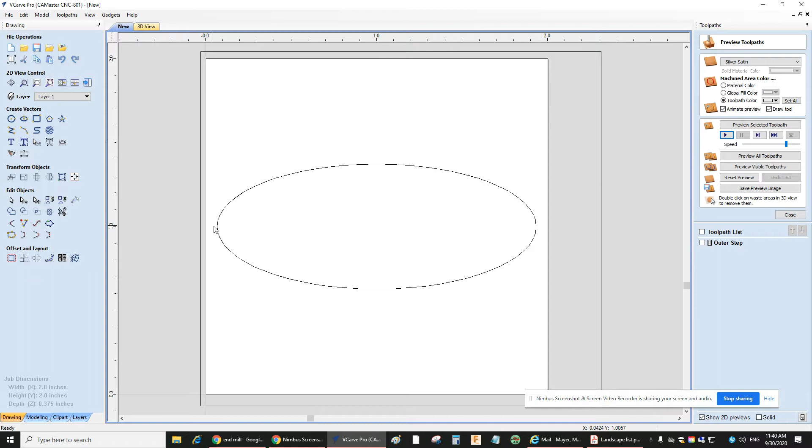So again, when you're using VCarve, the white square is the size of the material that you're assuming to use for your project work. Then you draw your vector paths with all these different tools. In this case, all I've done is put a simple oval in there. I want to leave an oval here. I want to shave off all this other stuff around and make it look like an oval island sitting on top of this square table, in a sense. To do that, I'm going to do something called a pocket cut for my toolpath instead of the other one. So I'm going to go in here, and I've already made it up.

In my pocket toolpath, I have 2 vector boundaries, the oval, and then this big rectangle outside. I purposely left it long over here and short over here because I'm going to force it to do something by mistake that I didn't want it to do. When you're setting up your pocket for this project, keep that number at 0. Put that at 180 thousandths of an inch, 0.180 in inches. The tool that we're using, I've already selected it, but I'm going to go under Edit. When you select, you've got to make sure you pick the end mill, the one with the flat bottom. And the diameter, D, is 0.25. You have to have that number right there.

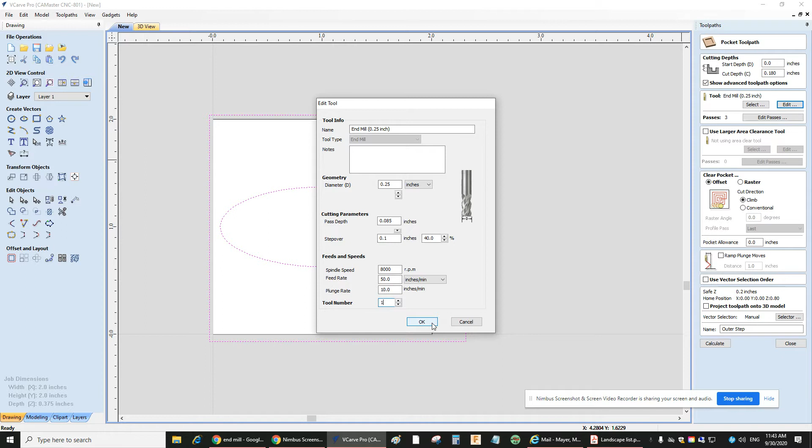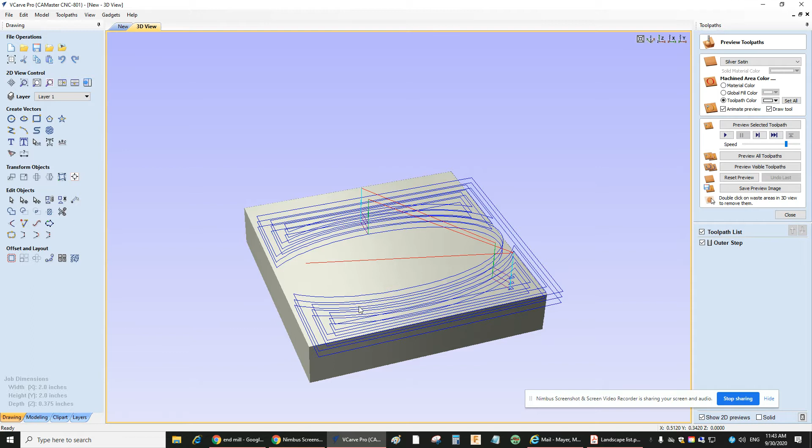Ignore that background. So you select your cutter, leave all the other settings, and then down here, make sure you call your toolpath a name that makes sense. I'm calling mine the outer step, and then I hit calculate. You'll see in the simulation the path that the cutter will take. I set the speed a little slower so you can watch, and I press play. It's going down 85 thousandths. Remember the pass depth? That's how deep it's going. Does the first pass. Now it's going a bit deeper. It's going to cut again the second pass.

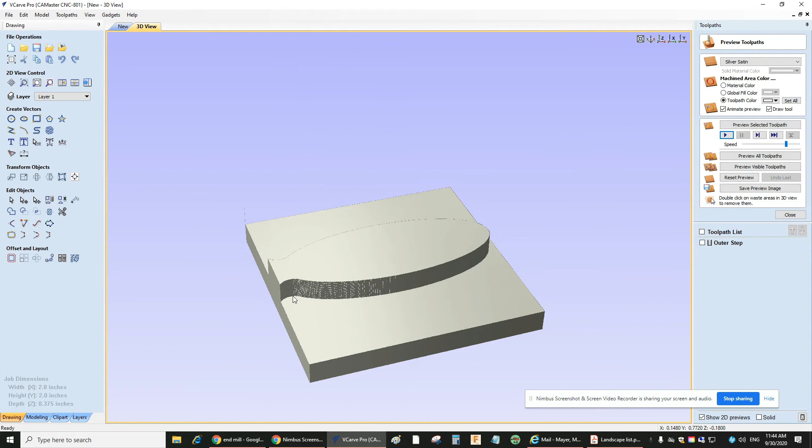Goes around. Some of you are already noticing, uh-oh, what's going on over there? Something's not looking right. Here's my third pass. It's cutting through another 85 thousandths of an inch. And that's the last cut, and then I'm done. Now if I look over here, that's beautiful. That's what I wanted. I get all this stuff out of the way. There's my oval island, and the cutter went through. But what happened over here? How come it didn't go through here?

Well, if you look over here, I'm going to zoom in here. There's not enough room in here. Remember, a pocket cut cuts between two vector lines. So I'm saying between this line and this line, cut everything in between, cut it all out, cut everything all the way through. That's what a pocket cut is.

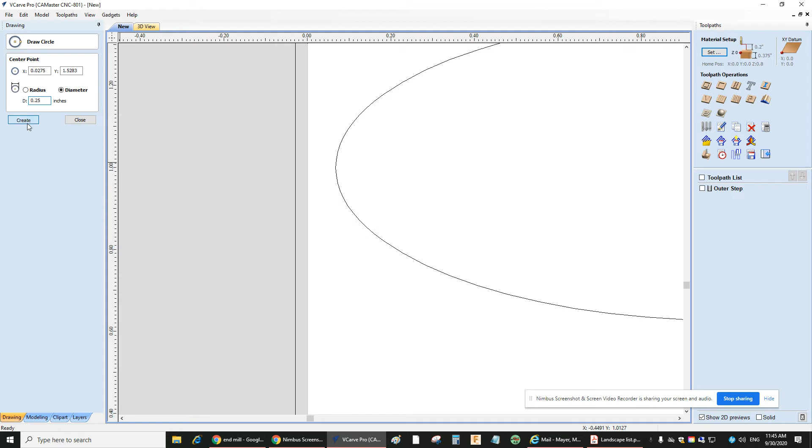So you're saying, go in here and between this line and this line, cut this out. But there's not enough space in there. Watch this little trick in case you're having trouble. I'm going to draw a circle whose diameter is 1/4 of an inch because that's the diameter of my cutter. If I go in here and say that circle, oops, I think I clicked it twice, sorry. That circle is a 1/4 inch diameter.

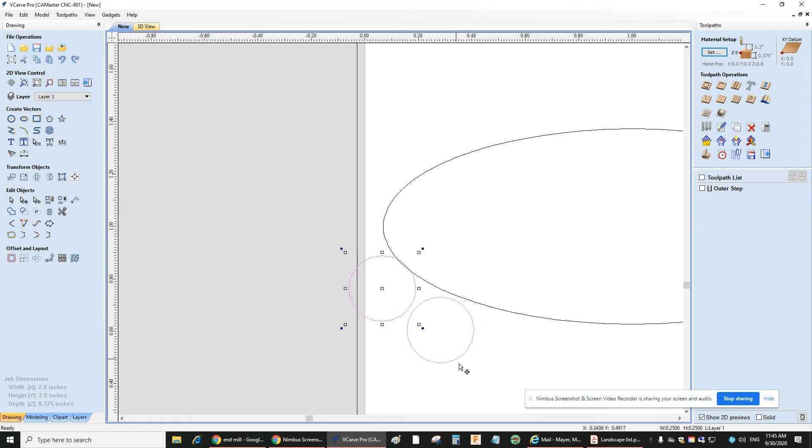So if I pretend that's my cutter going around, zing, zing, zing, and then you're asking the computer, go in here, and it goes, can't go around there. So if you look over here, okay, got in trouble here. If you go over here with the cutter, if you pretend, well, look, I've actually got it too big. I could probably bring this in closer and say, you know what, the cutter will still zing through there.

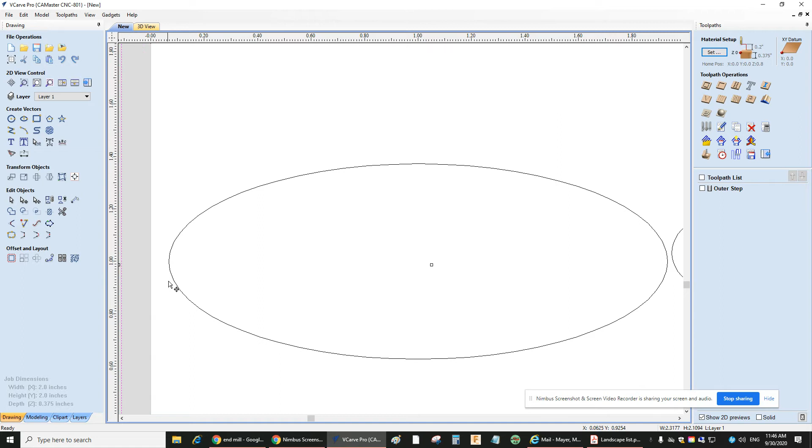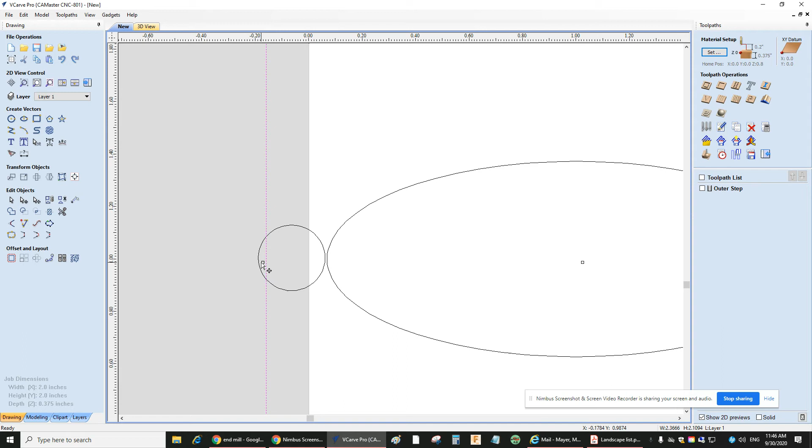But on the other hand, I've got to bring this one out. And I need to go out enough to make sure that my 1/4 inch diameter cutter can go through. Oops, still not enough. See that? So let me zoom in here. I've got mouse problems today. I'm going to go in here and stretch that out a bit more. Okay, now I should be okay. Now I don't need this cutter, so I can just delete that. I'm just doing it to help me understand what's happening. Zoom to fit, go back in.

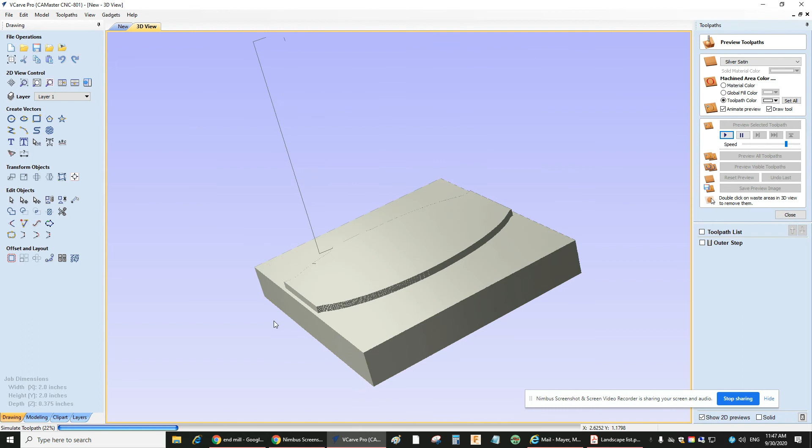I'm going to recalculate, reset, and let it rip. And now you notice how it's cutting on both sides of my oval. See, now it's going to work. I get a simulation that works. And I can actually speed this up. It'll go a lot faster. Boom, there's my first stage of my chocolate mold, and I get what I need.

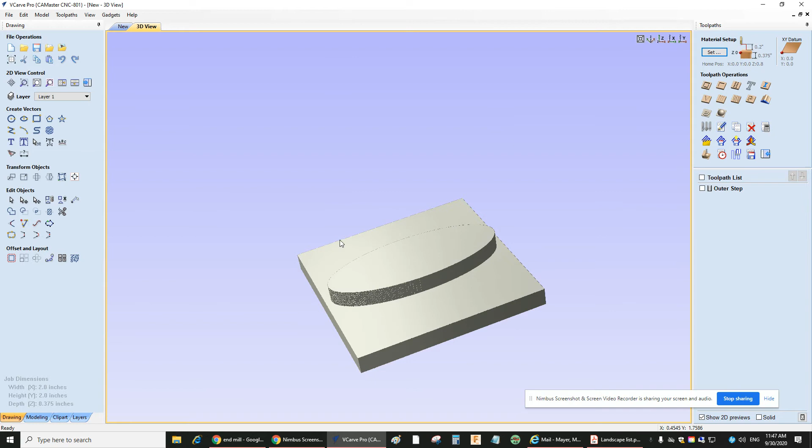Next good question, and I see this a lot when students are doing it. What would happen if I did this? Like really, why don't I just do that? Oops, sorry, that's not what I meant to do. Why don't I just do this? You need space? Give me space, baby. Open it up. Who cares? Well, you do care. Because if I do that, and then I recalculate, look at what it's doing.

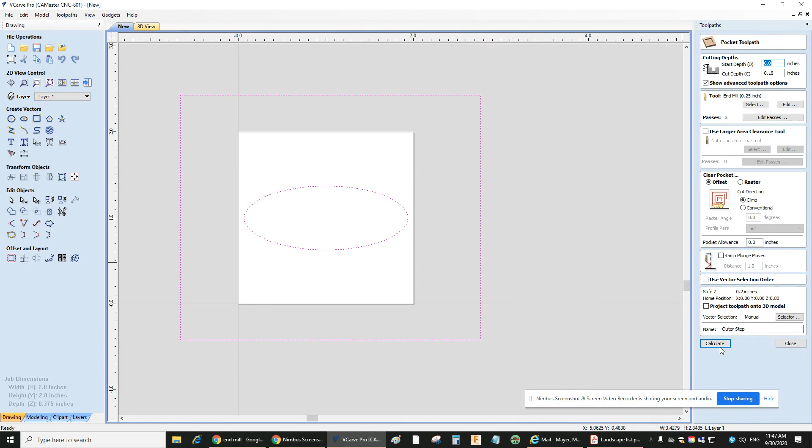It's basically going to say, okay, you want to cut between that path and that path? So the cutter will go along in the machine, and I always joke with the students who make this mistake. You're just cutting air. You're sending the cutter around and there's nothing there to cut because your aluminum piece is only this big and you're sending the cutter out on these XY coordinates way out here, and it just kills time.

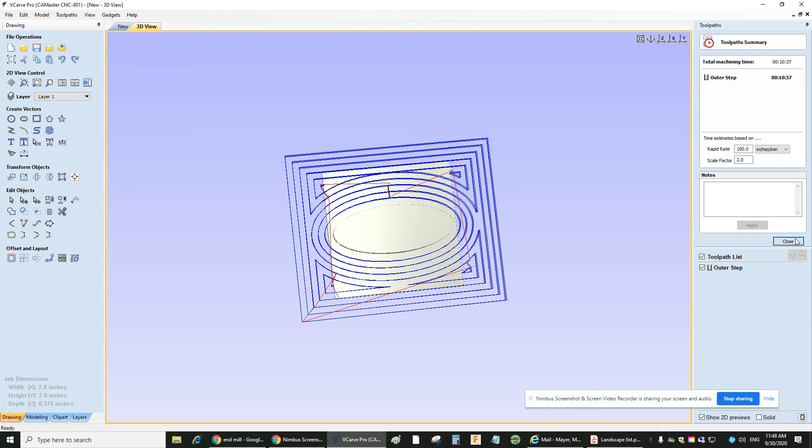So if you look here, there's this clock feature. I can't remember if I said it in the other videos, but you can check how long this is going to take to cut. And right here, it's going to take 10 and a half minutes to cut it. However, if I go back here and say, look, I don't have time to go out in La La Land cutting everywhere. If I bring this in a bit closer and make this a bit smaller, then I'm not wasting machining time cutting all over the place.

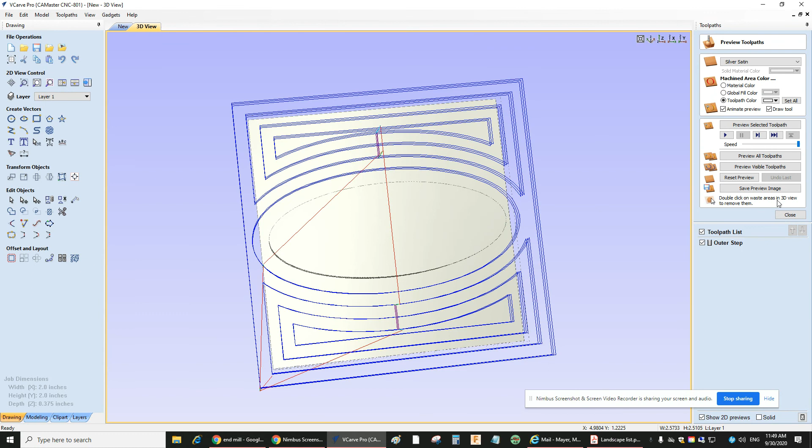And then I calculate, reset. It looks like it's going to work. I got the distance right, so the cutter can sneak through there. And I get the shape that I want. And then my cut time dropped almost to half that, less than 6 minutes. So that's kind of important, checking your cut times.

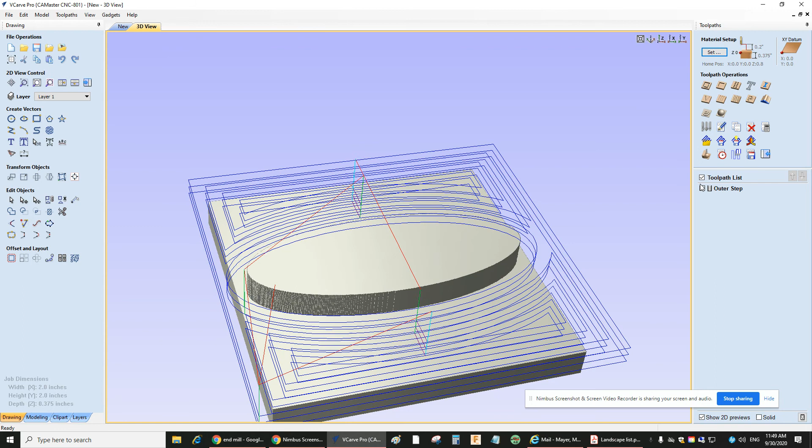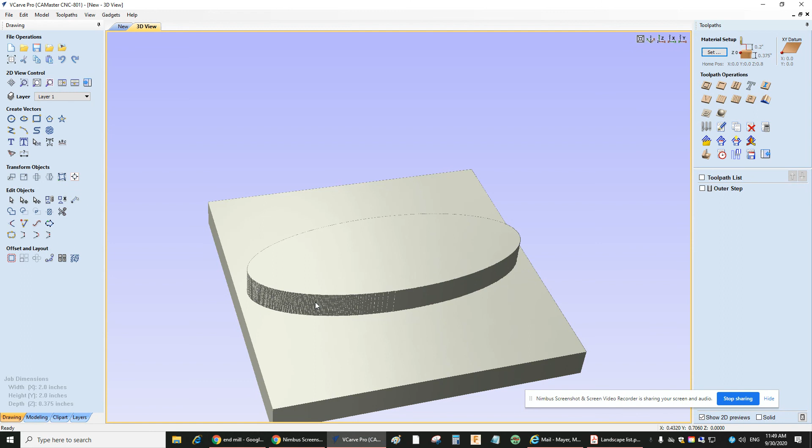Okay, so that's the first part of the video, making a basic pocket cut so you have an island. Again, for your design and your chocolate mold, it doesn't have to be oval. I've had some wonky designs, stop signs, hexagons, wigglies, anything. I've had students who want to go farther, level 4 kind of stuff. Right now I have one step: this flat goes up, step up, and then I'm on the flat. And some have had 2 steps, 3 steps, kind of like a wedding cake idea. You could do that as well.

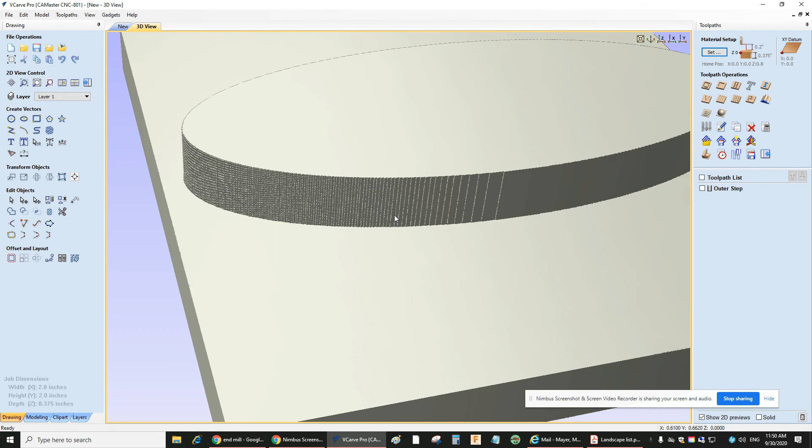And when you come into the classroom, I did cut one on the machine that has multiple steps. I'm not going to tell you how to do it, but that would be your thinking. How would I make multiple steps if I wanted to? This is just a very basic one. I'll leave that to your design. If you want a level 3, make a simple step like this. You want level 4, multi-step wedding cake idea.

In the next video, I'm going to show how to make something else on this step. I'm going to shave this step off and leave a logo or design on here. So that's for the next video. That's it. Give it a try.